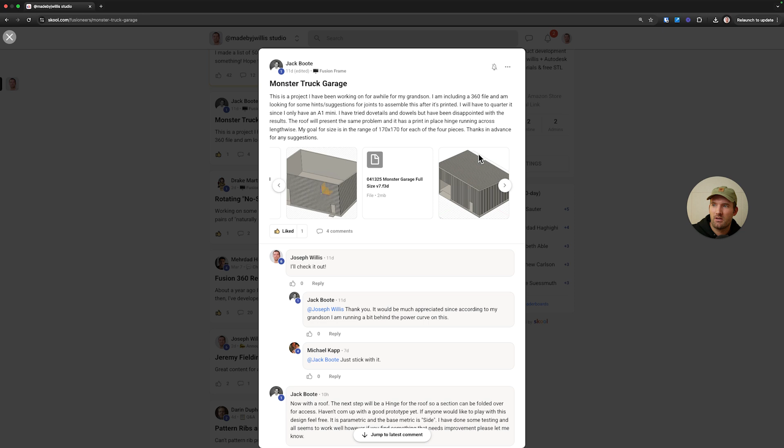He has this monster truck garage design, which is pretty cool for his grandson. He basically has a printer that's a little bit smaller than his design, so he's asking about how to get the roof to go together, and it looks like he actually figured out a solution for that. Another question he had was about a hinge for the roof. So I'm going to pull it up in Fusion and we'll go ahead and see what we can do.

All right, so this is the design file, and he's done a really good job with the design overall. Just a couple tips maybe, or I guess suggestions I would have.

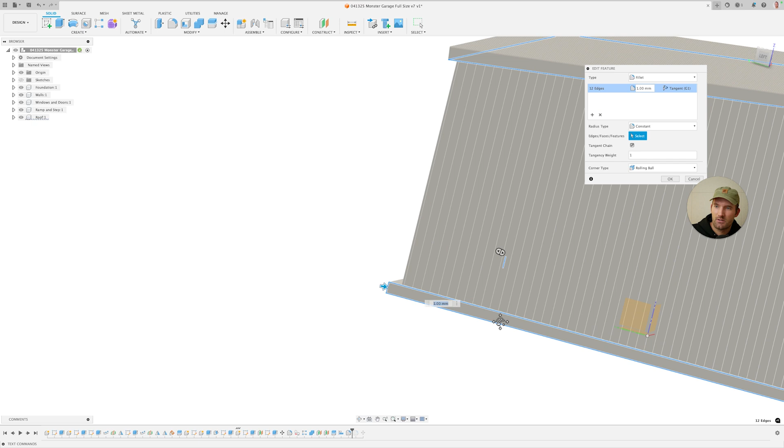On the bottom here he's added fillets, and instead of fillets I would add chamfers to this, just because you're probably going to be printing this bottom down. So I would probably just change these to small chamfers. I'm going to take these off here, and the reason is for the stair stepping effect. It would probably turn out pretty good the way he has it, but I personally prefer chamfers, and they usually come out better when you do that in the plane of the print bed.

I have some short form videos on this, some of them a little bit older at this point, but that's just what I would do. I'm going to take these off here, but actually up here it might be okay, and I'll talk about that more in a second, based on the printing orientation I'm going to suggest for these. So that is what I would do.

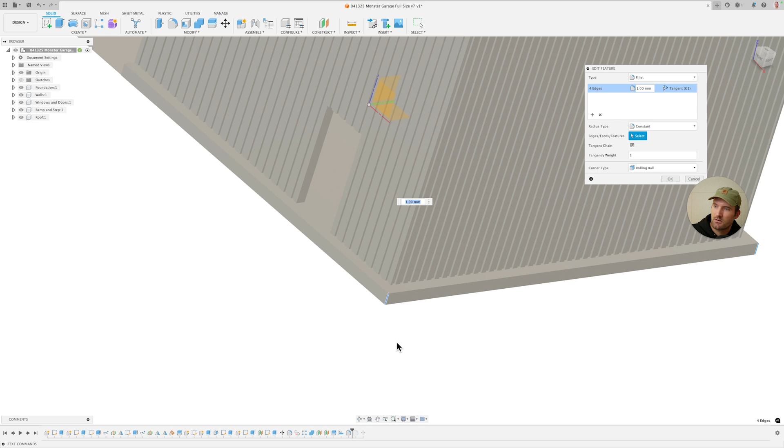So he has a 1mm fillet there, and this is just part of what I think about when I'm doing 3D printing. I'm going to click OK, and then come back and add a small chamfer here, and make this, let's see, yeah, 1mm. It's a different design look. Let's see, why is that having issues? It's probably right here, I bet, is the issue.

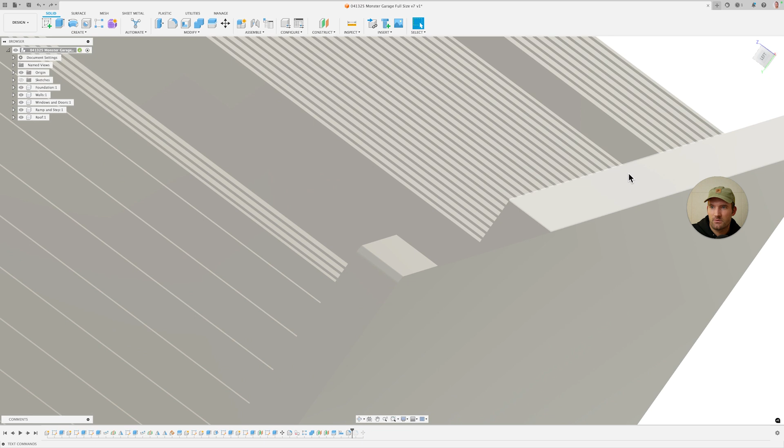I'm also going to suggest - I'm not going to go back and find this feature, I'm just going to use Q, which is press pull, and pull this up a little if it'll let me. Click OK. The reason I'm doing this is because you want to have a little bit of a wall or a step off. If you're thinking about the printer, it's really going to struggle with this because it's so thin here. So basically what I did was use press pull here, grab this, come up a little bit, and click OK.

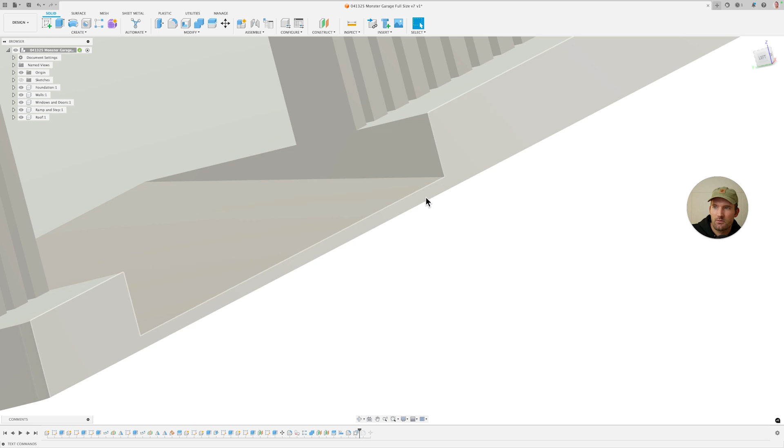So now this is 1mm, and you don't have to make it 1mm, but basically you want to have at least a couple layer lines so that it doesn't have issues printing this. It is a little bit of a step. You could probably get away with like 0.6 or so, but I'd try at least 3 layer lines just so that this feature will come out okay.

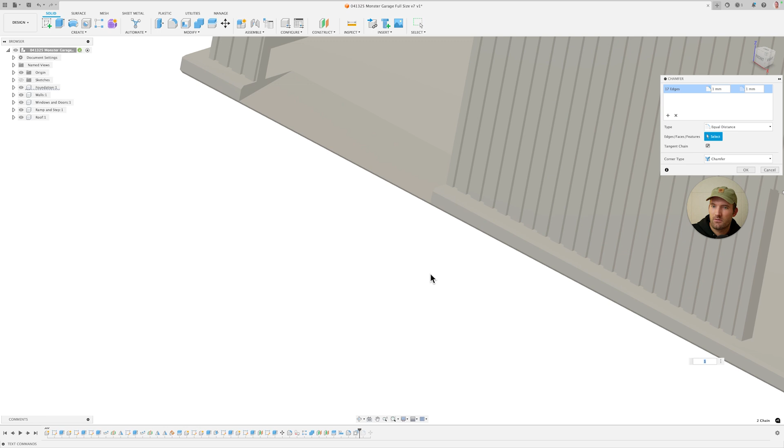I'm going to try that chamfer again, see if it'll work this time. Yeah, so now it's working, and probably not even 1 - I'll probably go with like 0.4 or so, so that's 2 layer lines. You can see here how that'll look, and this will just come out a lot better. It's hard to visualize with 3D printing, but if you can imagine there'll be a layer line there, and then another layer line, and they'll all go up vertically if you're printing this with this on the print bed. And I think that's my suggestion.

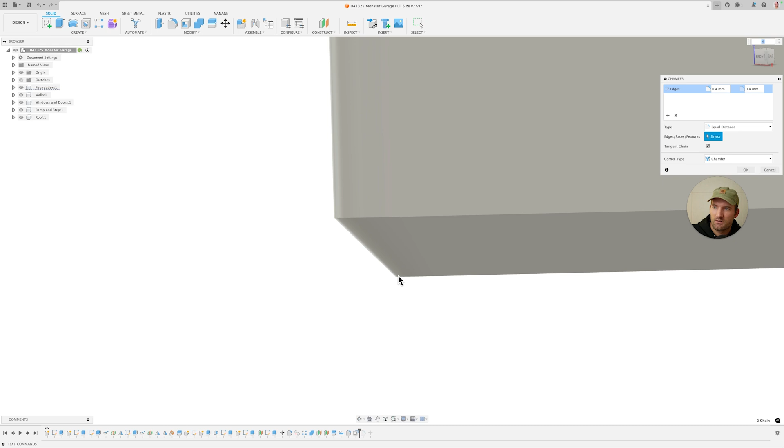The reason - if you think about the curve that was there before, if you zoom really far in and think about the layer lines, you'll have the first layer line here, and then the curve would be coming out, it's a radius, so the next layer line would have a little bit of an overhang. It's not really a big deal with smaller features like this, but at some point, if you have a really big curve, the layer line is basically going to be an overhang, and that's how you get the stair stepping pattern, because the printer G-code is trying to match a curve. As you visualize a curve, each layer is a little bit of an overhang, whereas this is just a straight angle, so it's just kind of a consistent overhang every time. Basically the overhang is the same, a 45 versus a changing overhang with the radius. So I have a video on that.

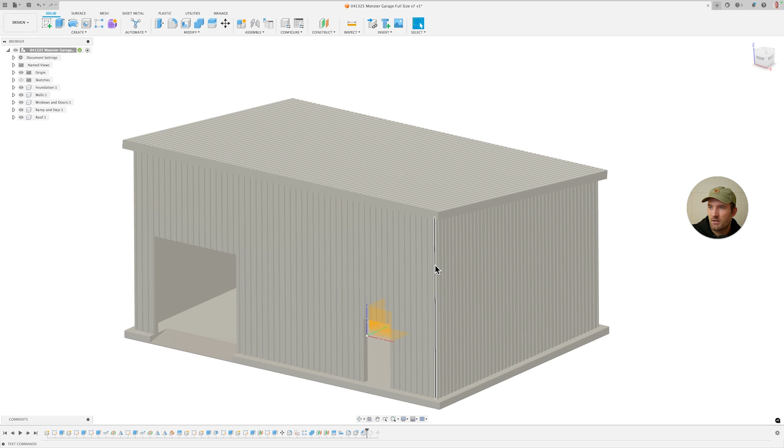So I'm going to click OK with that. And then you can also do the same thing up here, but based on the printing orientation, this might be different. The main thing he was asking about is how to combine the roof here.

So I'm just going to hide these other parts and focus in on the roof designs. I'm just going to select that. And so this is a harder problem because it's not only too wide, but it's also too long.

So his printer, this is 225mm. His printer can do about 170 or so. And then this width here is, let's see, 303.

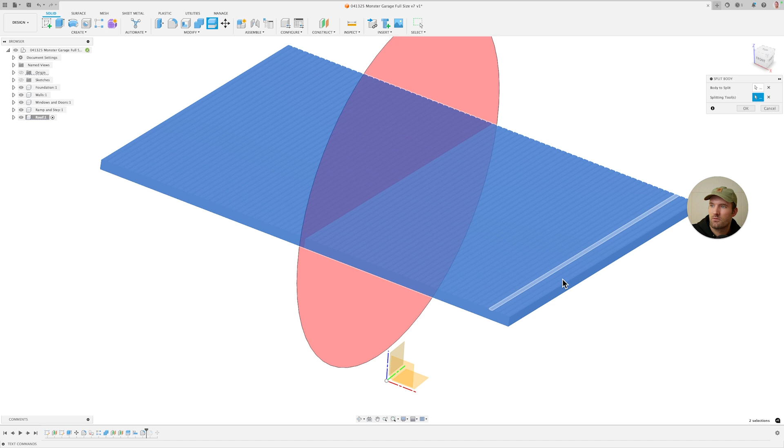So we would at least have to split this in the middle. And I wonder here, I think he has everything centered around the origin. So I'm just going to split the body with the origin and see if that's down the middle roughly. And so it does look like it's down the middle.

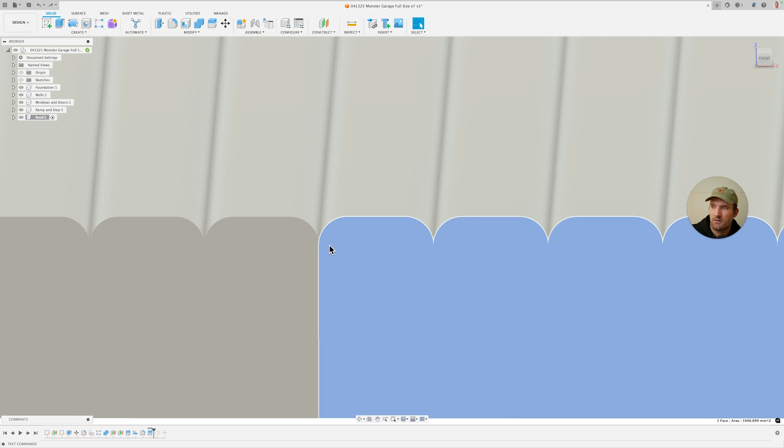So that's good. And one thing that I like to do, and I think he's basically already done this, is use a feature to be my split point. So you can see here he has these little divots in the roof, and it just so happens that this seam that he designed would also be the split seam. So I like trying to do that because that kind of hides the two parts a little bit to some extent.

And so now we have 151 millimeters. So we should be able to print this in one piece and this in one piece, but it's still a little bit too wide. So I'm also going to split it this way as well.

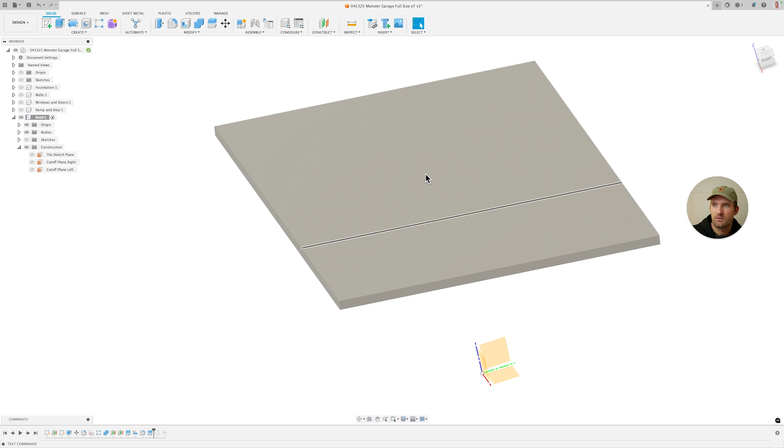So now another thing we want to do is to add a midplane here. Again, remember that this is too long, so we have to split it this way as well. So we're going to add a midplane between this face and this face, and then click OK.

And so now we see that we have a plane down the middle here, and so we can use that to split as well. So I'm going to click split body again, and then we're just going to select that, and then we're also going to select this as well, so it's going to split all of them together, and so that should go ahead and split.

And so now we have 4 different pieces. And so again, there's a lot of different ways you could do this.

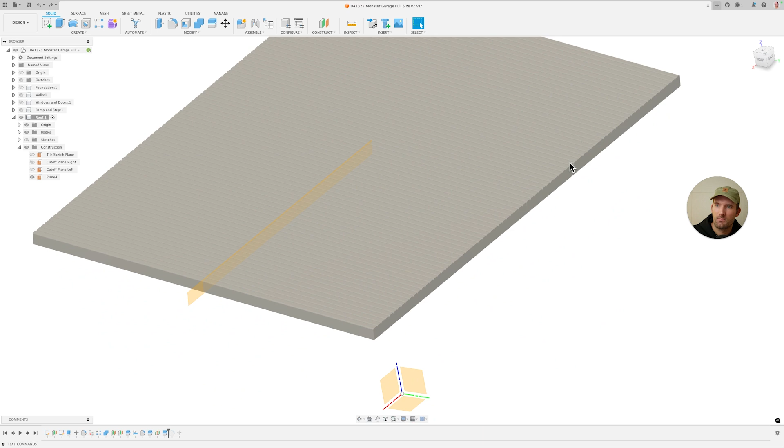The way that I like to do it, and I've done this previously in the past with different designs, is to basically just make a slot mechanism, and that usually works pretty well, especially when the parts are relatively thick. So this is around 7 millimeters thick, so I think it'll work out okay here.

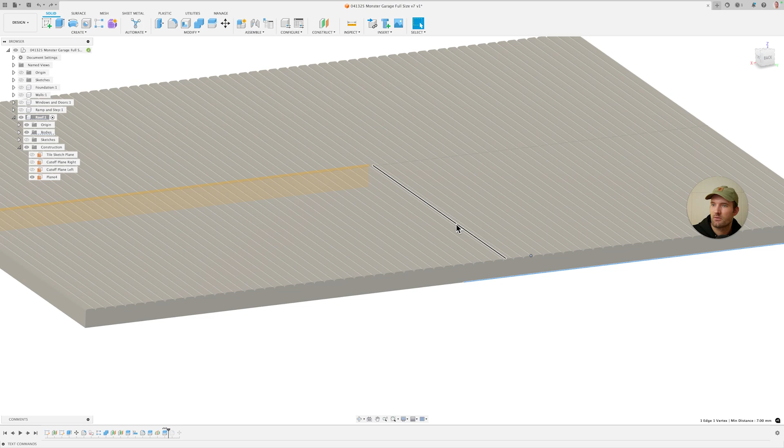And so we're going to assume that this is the front, so we're going to make this as clean as possible, and so we're going to take that into account when designing this. So what I'm going to do here is create a design on the back, and I'm also going to discuss the orientation for printing this at some point here as well.

So I want to create a circle here on this part, and see that I'm drawing on this angle. So this is at an angle, which makes things a little more difficult, but since everything's straight, it shouldn't be an issue. So I'm going to make a circle here.

I got my sketch turned off. There it is. I'm going to turn off these other sketches, and I'll rename that at some point, and then I'm going to create a center point rectangle, and I just use that because I can find the midpoint. If you can see a little triangle, that means I'm at the midpoint.

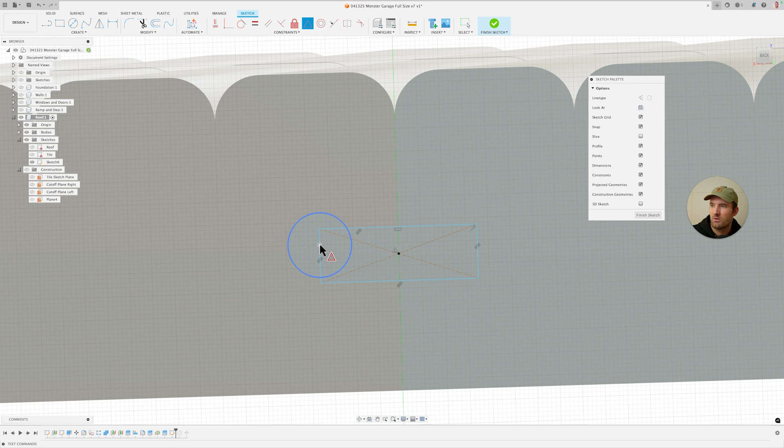And just come over a little bit, and then we're going to make this coincident with this, and then also make that at the midpoint here. And then the size of the circle can vary depending on what you're trying to do.

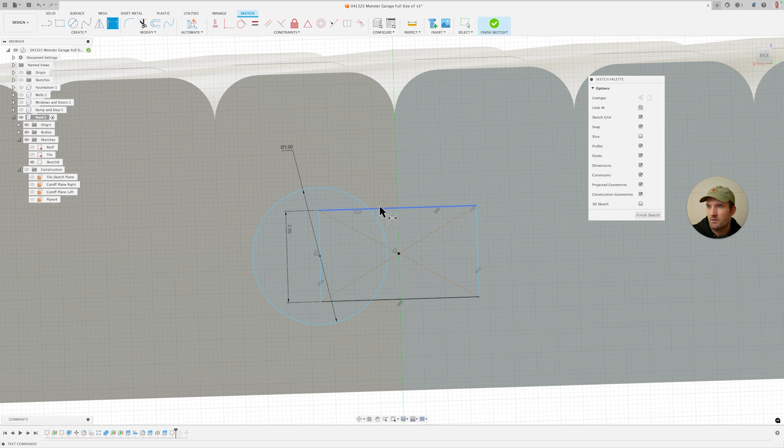I don't want to make it too big because that'll make the wall too thin on the side. So I think 3 is probably good enough. And then I'm going to make this 2 millimeters. I think that'll work. And then for the width here, which is really only half of this dimension, I'm going to make it 4, and I think that'll probably be okay.

Then I'm going to click Finish Sketch, and then make sure I bring my sketch back. I'll just name this Slot. And so now we have a sketch there. And so I'm just going to extrude this part all the way out. So I'm just going to cut it first.

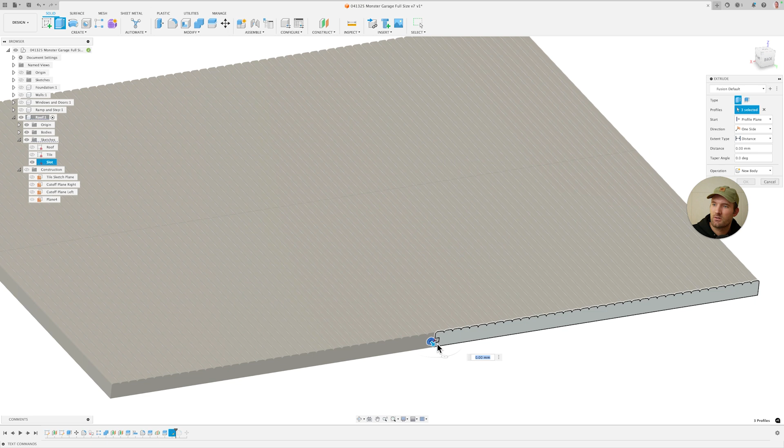So I'm going to cut through both of those bodies, and I'm not going to go all the way to the end. The reason I'm doing that is because I want this front piece to be as smooth as possible. So I'm going to click OK there, and that should have cut through both of the bodies on this side. Yeah, you can kind of see how that other body is down at the end there.

Then I'm going to bring that same sketch back up and extrude again. This time I'm going to actually combine it with this body. So I'm going to hide these other roof parts. So which one is it? So we want to hide...

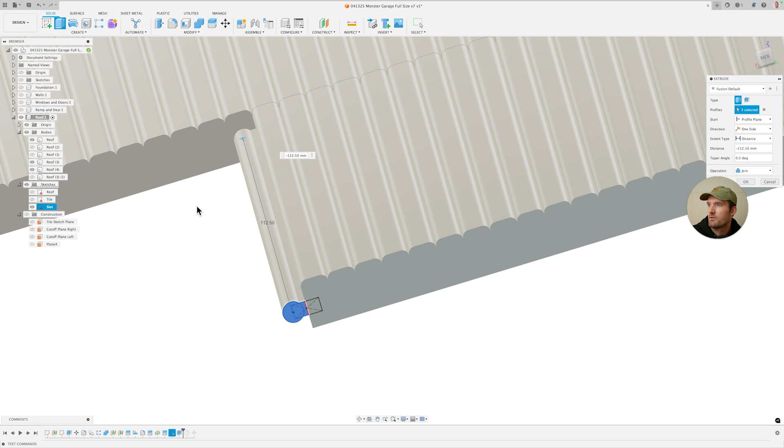Let's see. Yeah, we want to hide that one, and we also want to hide this other one. I'm just going to hide them real quick, just clicking V there.

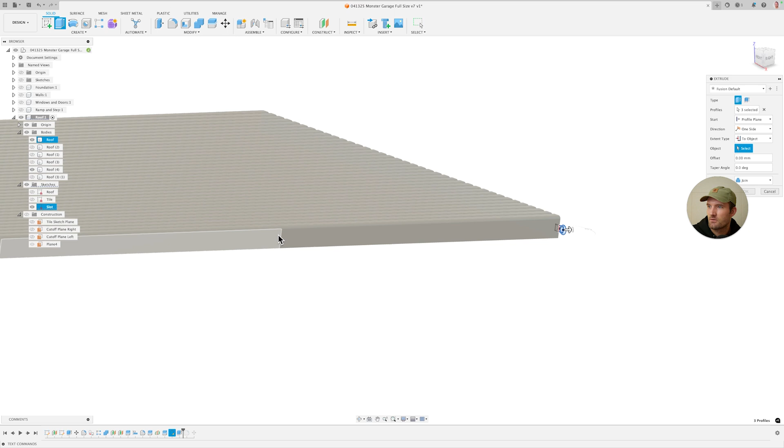So just extrude this out. And if I connected them both, which I really probably should have done before splitting the bodies, but that's kind of hindsight is 2020. So I'm just going to go to here, distance to object. I'm just going to do it to this kind of split plane that we had. It should let me do that. There we go, click OK.

And so now I can just bring that other one back up. Let's see which one it is. There it is. So then I'm going to extrude this again separately. I should be able to just join the one that I want to join, hopefully.

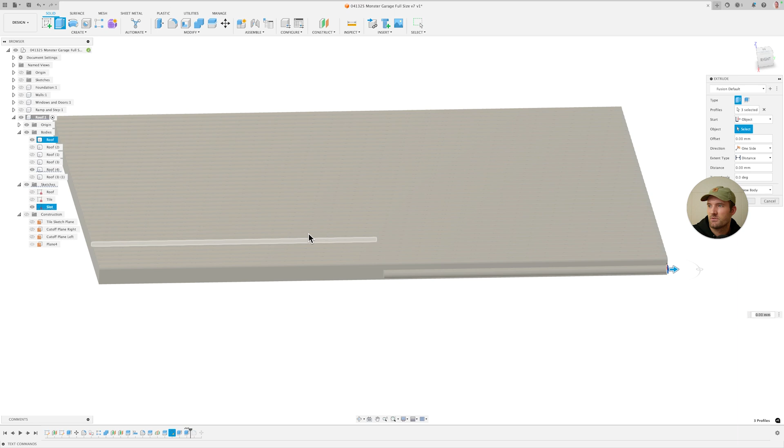This is how we can do it. So we can click extrude and then select these again. And then we're going to do start from object. And then I want to start from this kind of cutout, which we can see if you kind of hover over it.

So I'm going to hold and click and hold and see if it'll let me select that face. I want that face right there. The way I did that, if you're not familiar, if you hover over where you think something is and hold the left click, it gives you these face options, so it lets me select between the two, and I want that kind of profile face.

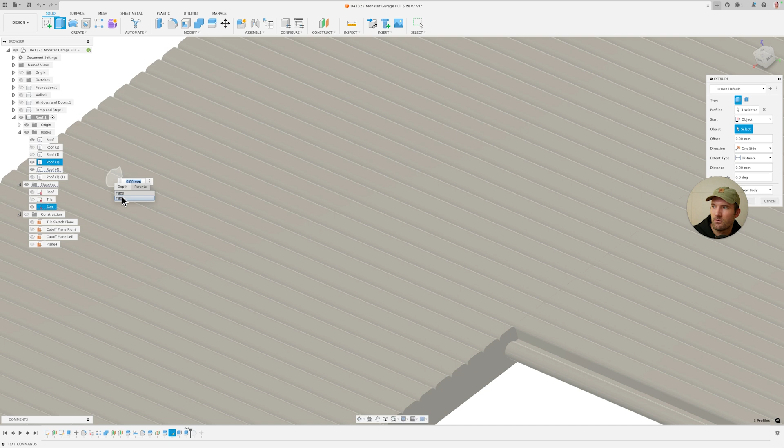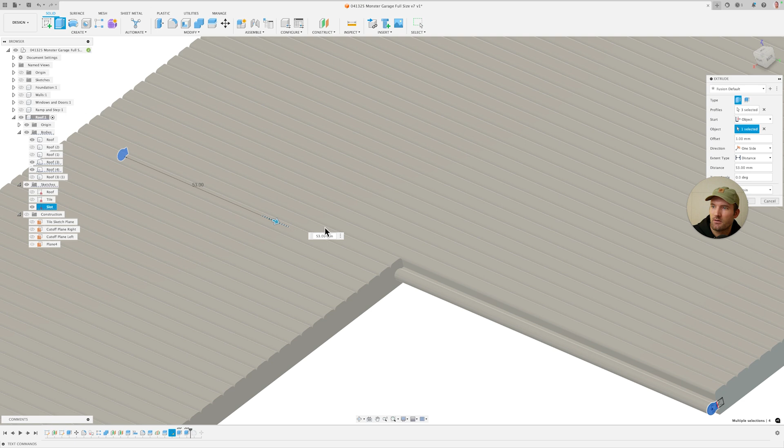So we want to do an offset here of about 1 millimeter or so. The reason we're doing that is we don't want the part to basically not go in far enough. So I offset that flat piece a little bit. Now this is coming out. We don't want to cut through, we just want to go all the way basically to this face.

So we're going to do the distance here to object, to this object. And then we want to make sure that it joins with the right body here. I'm going to turn this one off and then also that one off, and now you can see what we made.

So we made that other profile here, and you can see my offset is a little bit off the bottom of it. You can play around with this amount, it doesn't always have to be 1 millimeter. We can do like 0.4, which is probably enough depending on your printer. Then we're going to click OK.

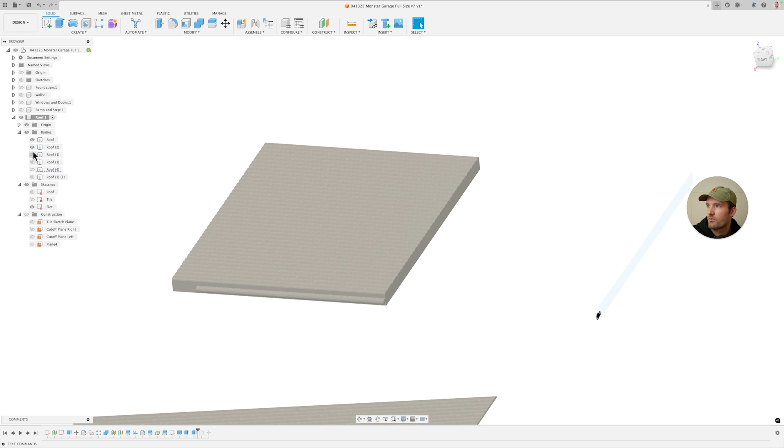All right, so now we have the 4 roof pieces, and this should work. The only thing we have to do now is add a little bit of tolerances. So keep showing that one. Okay, so just to show you again, we have these 2 slots, and the way this will work is they'll slot together.

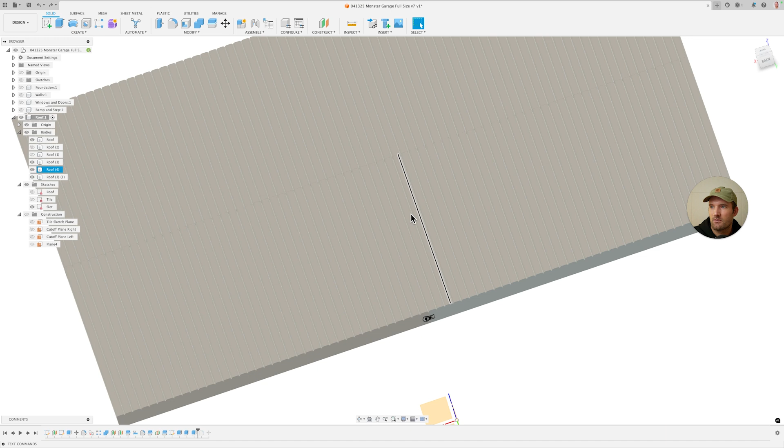The only issue now is that these pieces are not kind of interconnected with each other, so we're going to have to add another feature for that. But we have basically the two split halves connected. You can do that individually and then basically make the piece come together in the middle. The way we're going to do that is I'm just going to add some kind of dowels in the middle. There's different options for that, but that's just one I was thinking about.

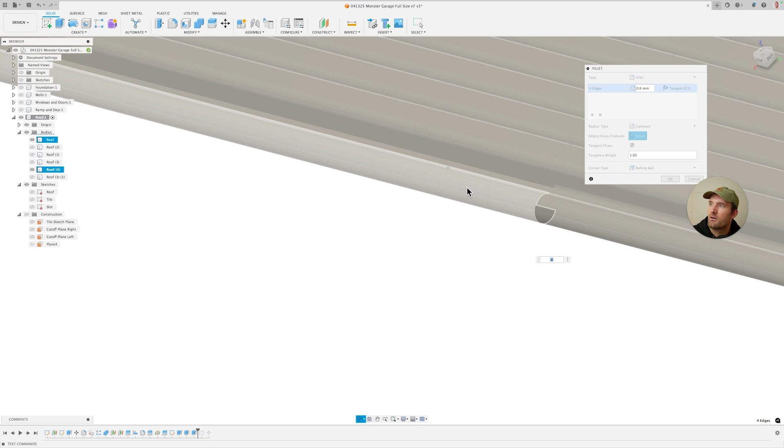The last thing to do for these parts that I like to do is add a little bit of fillets here to make them go in a little bit easier. So I'm going to click F for fillet and then select these parts here, these little edges. This just makes it print a little bit easier. So even let's do 0.6, yeah, something like that really helps. You can see it kind of goes all the way down. Make sure we select this one as well since it's a separate piece.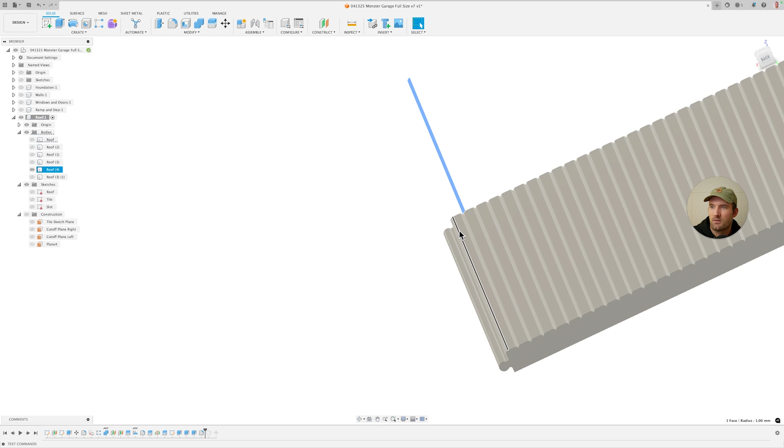And again, you could have gone in a different order and probably been a little more efficient. But again, I'm trying to kind of show y'all just my thought process on it. And then I'm going to do the same thing. I'm just going to go ahead and do this because sometimes it's hard to see the other one. So I'm just going to add 0.6 to the other one, or the other 2 here.

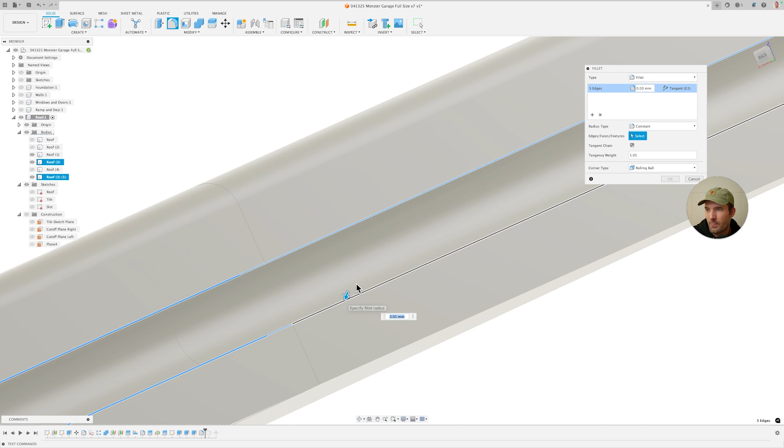All right, so fillet again. And we're just going to add the same amount to these. And then we're going to add a little bit of tolerance here as well, or a little bit of clearance, depending on who you're asking, I guess. All right, so these are all 0.6. Okay. And click OK. And then now I want to make it where they'll slide a little bit easier.

So I'm going to do modify, press pull. And I just want to make it like -0.1 or so and make sure that that's actually getting applied, because sometimes it doesn't really show up very well. So it doesn't really look like that worked. Let's see. Try it again. Press pull. Sometimes I like to do a little bit of an exaggerated thing to see if it's working.

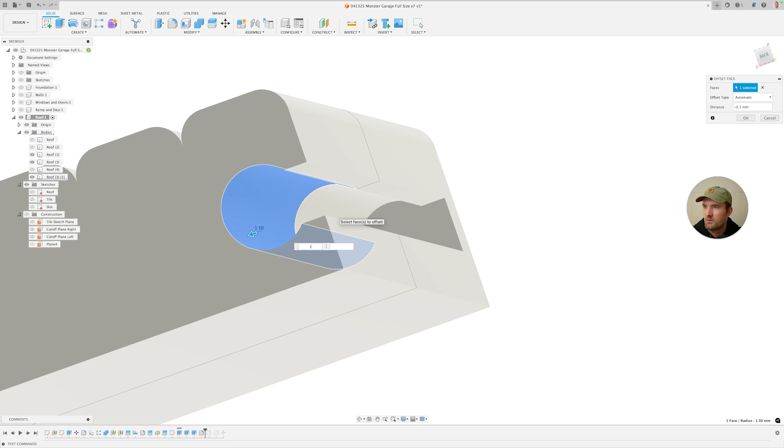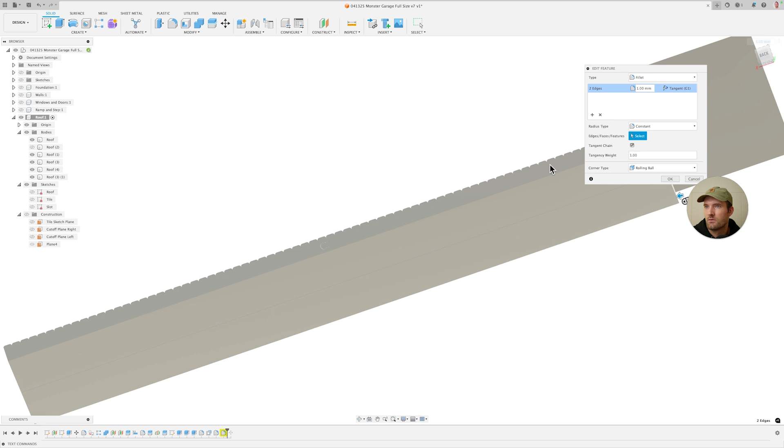So I think I'm actually going to just go before here and do a press pull here. Sometimes press pull is a little finicky. Now it's working. Okay. Click OK. And this should still work. All right, and so now you can see, if you zoom in, there's a little bit of clearance there, and that's just for the tolerances of the printer and everything else.

And usually about 0.1 is what I use. Depends on your printer, but this should make it where it'll slide together. And you can see here that there is no clearance here. So really it's just compensating for that as well if the edge isn't perfect. But this usually results in a pretty tight fit overall.

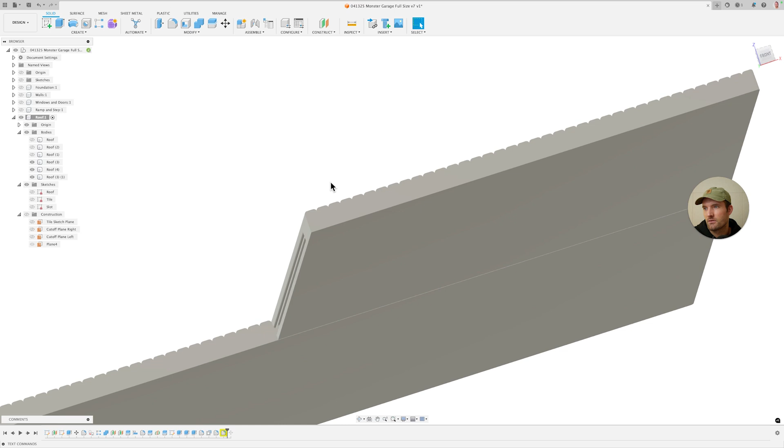And then here on this side, I want to hide this again. On this end, you really can't even see that there's the joint because we have it kind of covered up, hidden back in there. So the way that I would print this, and this is kind of important for the purposes of this, is actually upright. So I would print it with this being on the print bed.

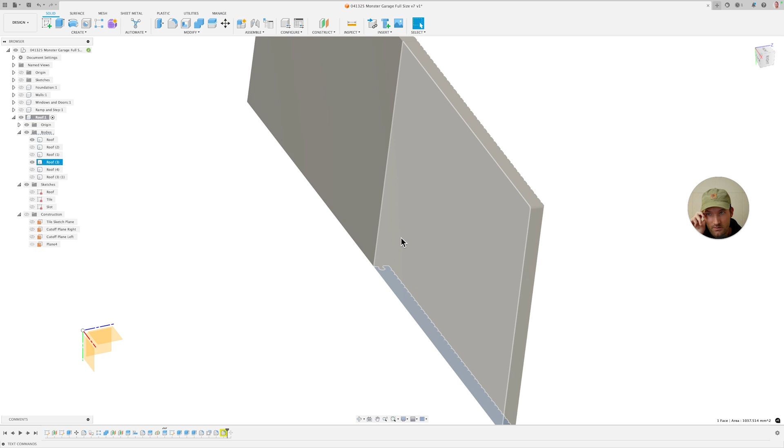And the reason for that is if you print it with this on the print bed, which is how most people would probably think about doing it, it's not going to do these slots very well because it'll be an overhang, or you have to use supports or something. Because if you think about this tube, there's nothing supporting the top of the tube as it's printing. If it's laid down like this, printing the slot part, the top part is going to be overhanging. So if you print it like this, you won't need any supports.

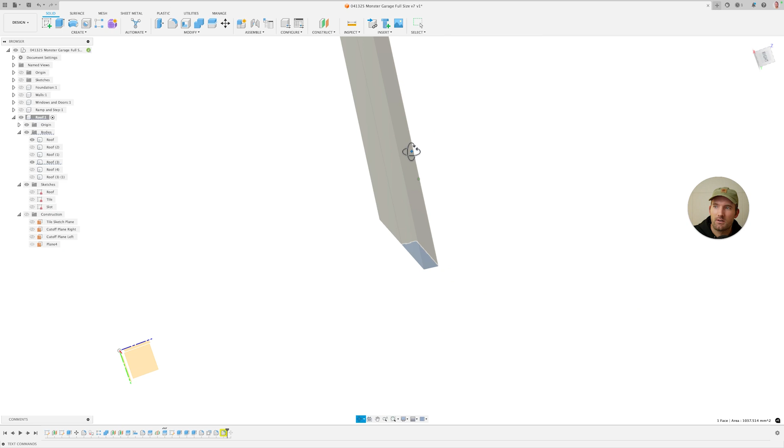And these features are actually better if you print it that way because these are curves, and the printer will do well with those curves. And so that kind of leads into this fillet part. So I'm just going to delete that. And the way I would design this, I would probably have a fillet here, which seems like what he had before. And then you can add a chamfer or something on the top, but I would probably leave the top flat. I think that would give it a nice little feature there.

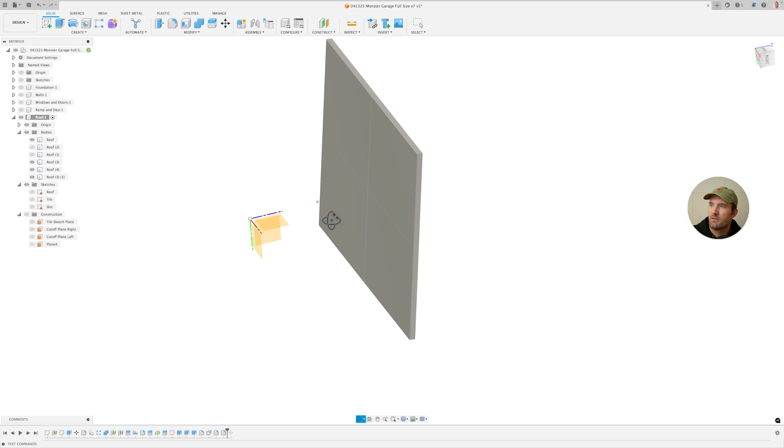So I'm going to add those back here just to make sure that the front and the back have the same little design on them. All right. And so I think that is about it. So the last part would be to add some type of cutout or something here to get these to go together. And you could do this a couple of different ways.

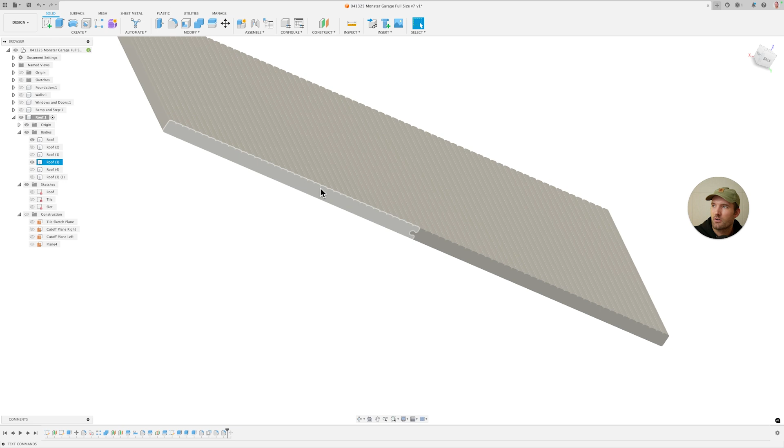One limitation now is that if we're printing it this way, we can't really have anything that pokes out because this is going to be on the print bed. So we need to probably do some type of slot mechanism. And that's probably what I would recommend. It's not the most rigid thing ever, but it should work for this. So what I would probably do is just make some type of little dowel system and use hexagons.

I've mentioned this a number of times on my different videos. I like the little hexagons, and they're just easy to do. They're simple to print, and they usually work pretty well. And if you just do a properly calibrated press fit for stuff like this, it should be fine. There's a lot more elaborate things you could do, but in general, I find that this works pretty well.

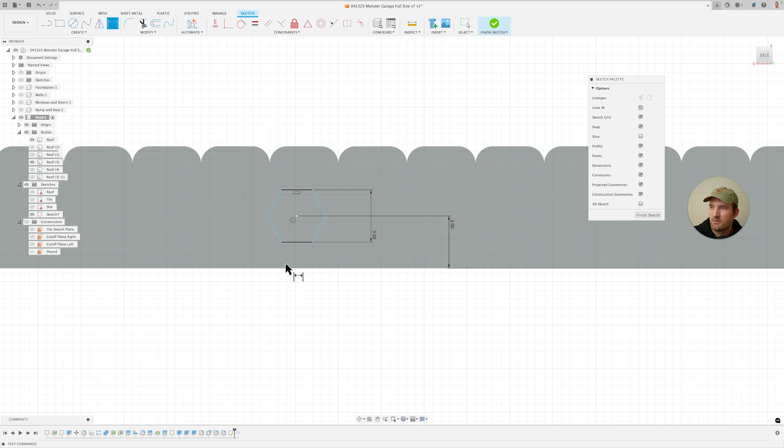So I'm going to make these 3 millimeters, and then I'm just going to dimension this 3.5 because I know that's the center of the 7 millimeter high part. It doesn't look like it's the center because these have the little details, so I might actually just do 3 just so that we don't mess up the detail there. So if you're considering this is the top end and this is the bottom, that's probably closer to the actual distance. And then I'm just going to find some kind of arbitrary distance there,

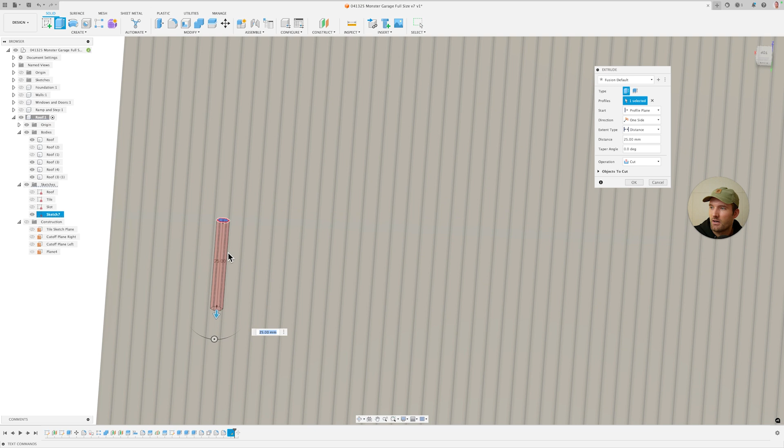and I'm going to click finish sketch. And then I'm just going to extrude these both directions here, make all this visible. So we're going to go, I don't know, let's do like 25 or so, and then do this symmetric, so it's going into both sides. And then the way I'm going to do this is I'm just going to do one at a time, and then I'm going to dimension the pattern, so rectangular pattern of the features. Just going to be that. And then the axis, I'm going to use that as one of the axes.

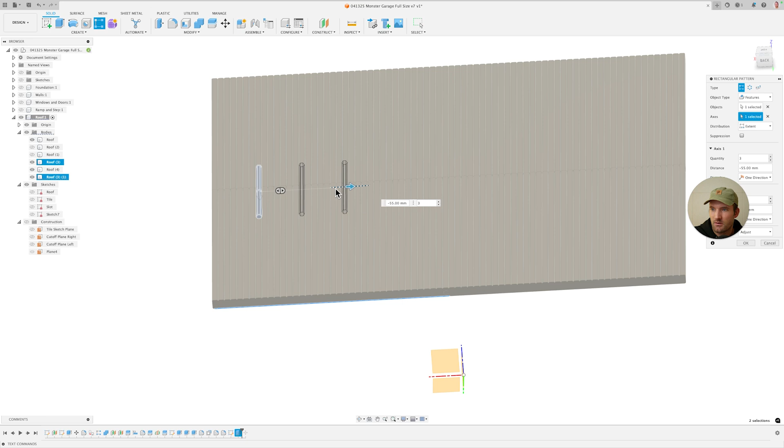And then, let's see. Let's just do, and you could do a little bit better job of making these symmetric and whatnot, but just for the sake of time, I'm just going to do what looks okay and click OK for that. And so now we should have 3 little dowels there. And so now I'm going to mirror that, if it'll let me, create a mirror of features of that initial one, as well as the pattern, and the mirror plane is going to be that mid plane, since everything's about the origin, which is a good design detail he did.

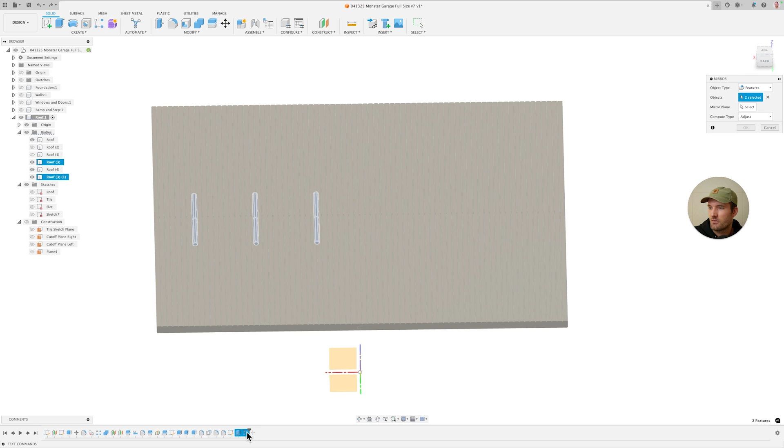And then click OK. And so sometimes that doesn't work. So let's see if I can do it a different way. Mirror, again, features. We're going to do both of these. Mirror plane is here. Sometimes if you change it, it works. I guess not. Okay, let's see. Another way to do this. So that's another little bit of a frustrating thing sometimes.

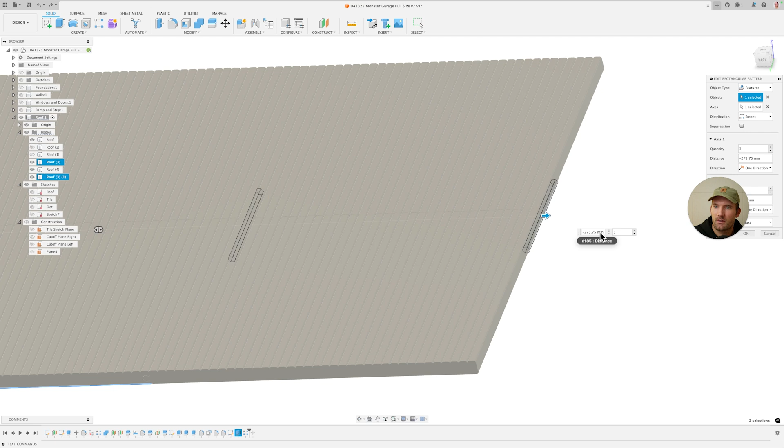Okay, so I'm just going to extend this all the way to the end. Let's see how far. So it's 273 to the end. I did a 30 millimeter offset, so I'm going to say plus 30. And so basically what I was doing was back calculating the distance. So this was 30 millimeters off, I think. And so to get this 30 millimeters, I just said to the end and then added 30 because this is a negative value here. So you can see it's negative 273. So it's added 30, which brought it back 30 millimeters.

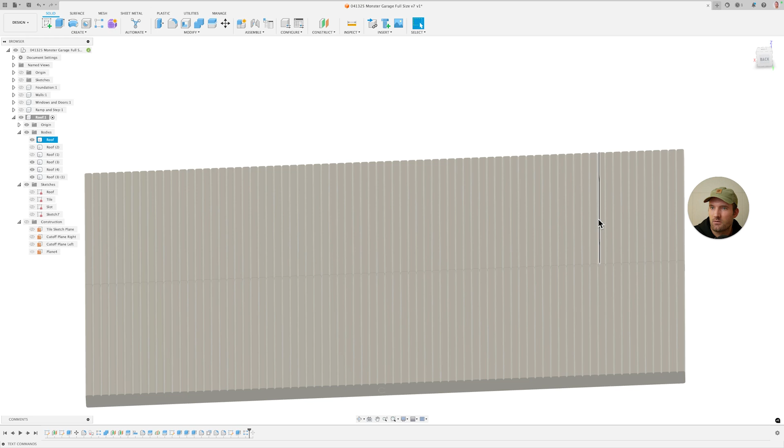So I'm just going to change this to like 6 and just make sure that the split there is down the middle. And so that looks pretty close. It might not be perfect because if it's measuring from the edge of this hexagon, it would technically be like 1.5 millimeters off, but for the purpose of this tutorial, I think this should work. And I'm gonna click OK, and then we're just gonna make sure that we have those, and we don't.

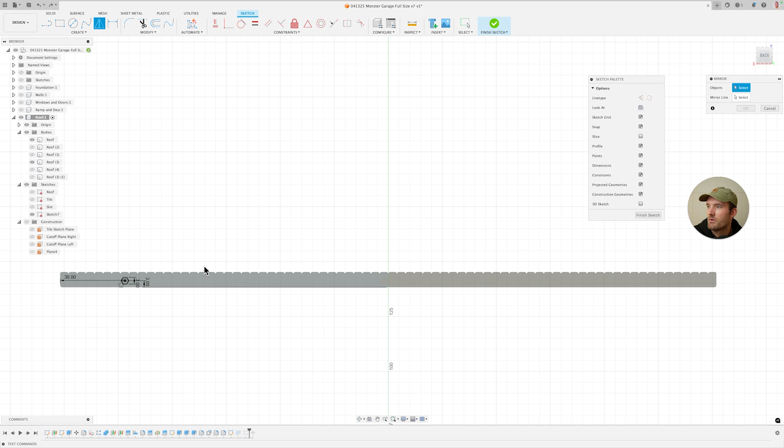So I think the problem with this is it's not picking up that this is a different body. So we might have to just make another one. I think it has to do with it being a pattern. Yeah. Okay. So I'm just going to go back, edit sketch. I'm just going to make another one real quick. Actually, let's do this. So I don't usually recommend doing mirrors of sketches, but this is kind of one of those times where I think it would make sense.

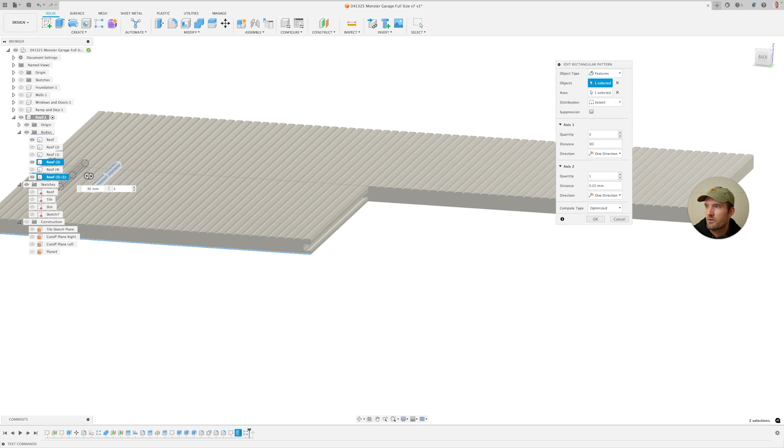And then the mirror will be that. So now you see we have our hexagon over there. So, okay, finish. And so now we can make this back into 3. And our distance, we can do like 30, I think is what we had. And so now we can go and extrude the same thing again. Again, this is not the most optimized solution, but we're going to get there.

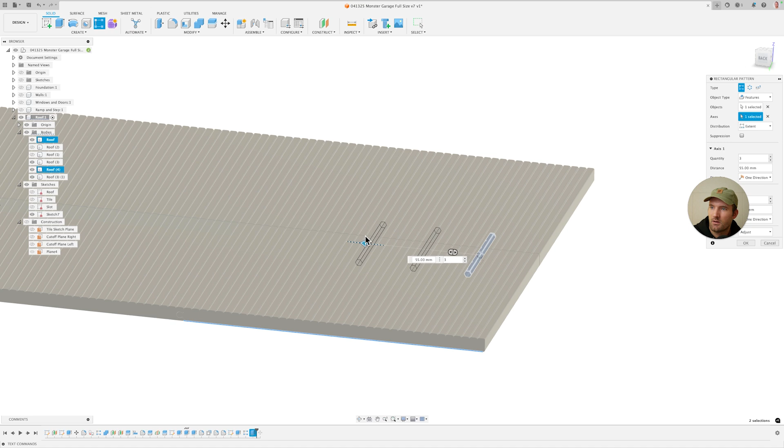So we did 55. All right, so I'm going to extrude this. It's going to be symmetric, 25 each side. And then we're going to do our pattern again of this. And it's going to be on this angle. And then we did 90. All right, and so now we finally have our features there. So now we have the different little plugs.

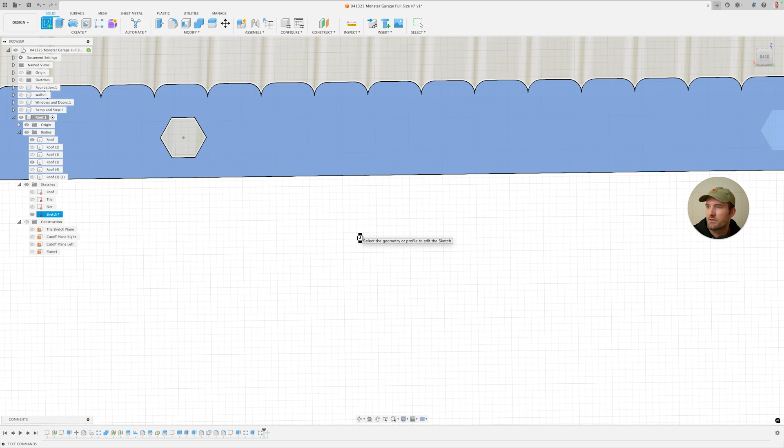And so what I'm going to do is I'm just going to make one of these. So to make our little dowel rod, all I'm going to do is create another sketch here. And you could have done this on the first sketch as well, but I'm just going to offset this a little bit. So offset, and then see if we can select that. If not, we can project. So we need to project it first.

Click OK, offset. And so we just want it to be a little bit smaller so that the rod will fit in there. And you might have to play around with this. I'm going to try -0.1, but it's going to really depend on your printer. And so then we're just going to try and select just that inner profile.

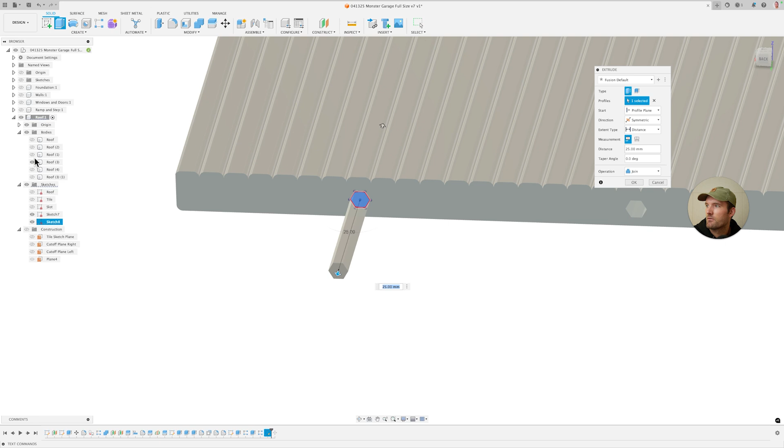And then last time we made these symmetric, basically 50 millimeters total, because we did 25 in both directions. And if we turn off that, so that's 50 millimeters. So I'm going to do like 24, and that's just giving you 1 millimeter on each side to have a little bit of play, just so that it doesn't prevent you from getting a tight fit there. And then I'm going to click OK.

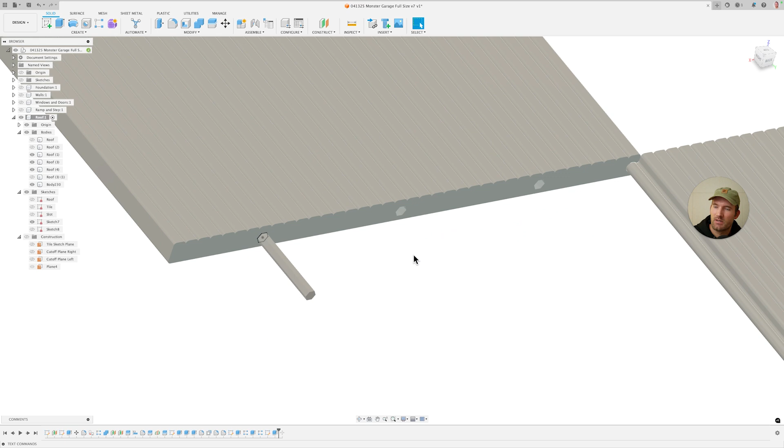All right, and so now we have all of the parts again. And so you can see how basically you'd have these 4 pieces, and then you have the dowels going across to anchor it this way, and then you have the slot going through the middle to keep these together. And so I think that would work for this design. I think it would turn out okay. You'd always have a seam down the middle here, but otherwise I think that should work all right.

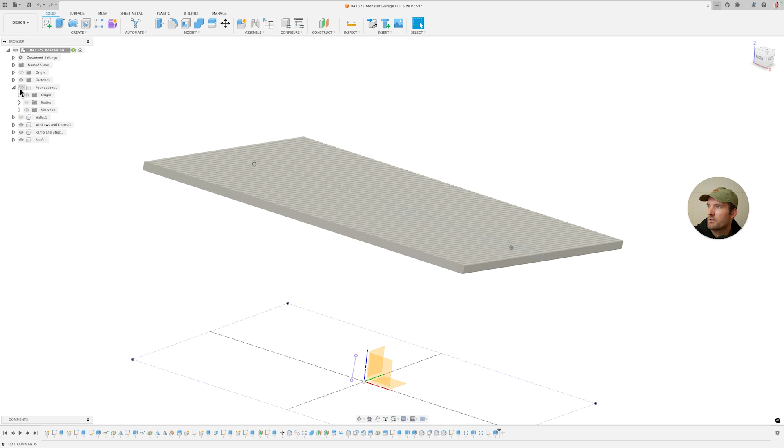And then I guess, the last thing, he mentioned a hinge system, and that sometimes can be a little bit more challenging just from the aspect of, there's a lot of ways to do it, and I want to try and get all the bodies to show up here. All right. Okay, and so now what I would do personally is I would make it where these have little ridges inside of them, and they kind of sit down inside of this.

So I would basically forget about the hinge and make it where it has kind of like a cubby to sit into. So the way I would do that is I would take this, and I would just have a little extrusion along the side here with the angle so that you can print it since this is going to be oriented vertically, and print it that way. And that way you could just take the whole top off and put it back down.

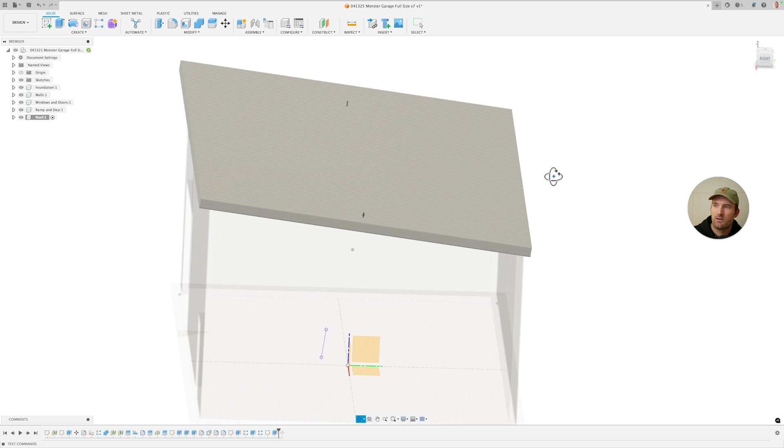It would be a little fragile because of the joint here in the middle, but I think in general that would probably be a more clean solution. Anywhere you put a hinge with a part this big, you're going to probably need something that's relatively reinforced. And if kids are messing with it, it's probably pretty easy for them to break it, just to be honest.

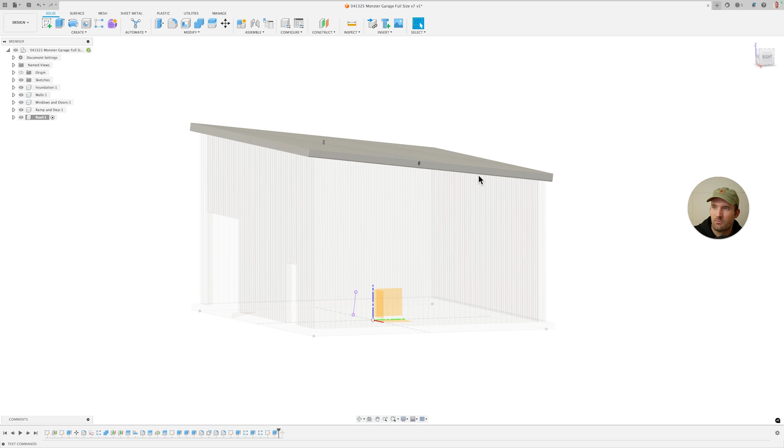So this is what I would do. I would come here, and let's find a good spot to do this. I'm just going to draw it off the center, off the mid plane here. And I would basically project and get the edge of these parts here. And really could have done this beforehand. And then I'm also going to project this wall here. So I want to get the inside of that face.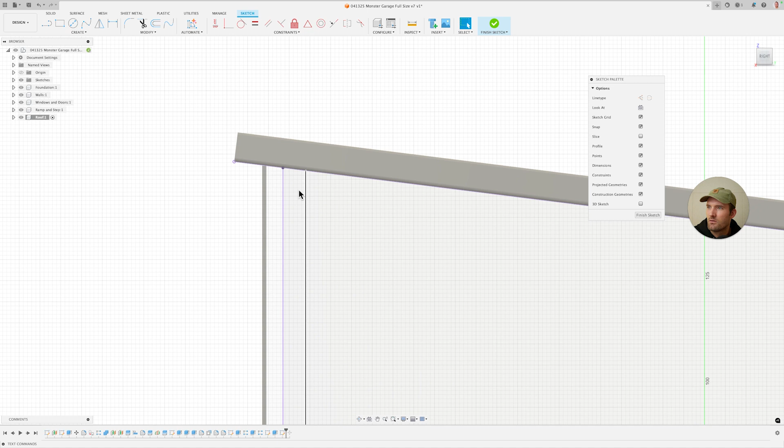I'm going to right click and hold, and I should be able to select that. Yeah, so that's the inside wall. So I'm going to click OK on that. And I'm going to project the other inside wall here. So again, click and hold, and it lets you select that wall. And then click OK. I think that's the wall. It's kind of hard to tell sometimes.

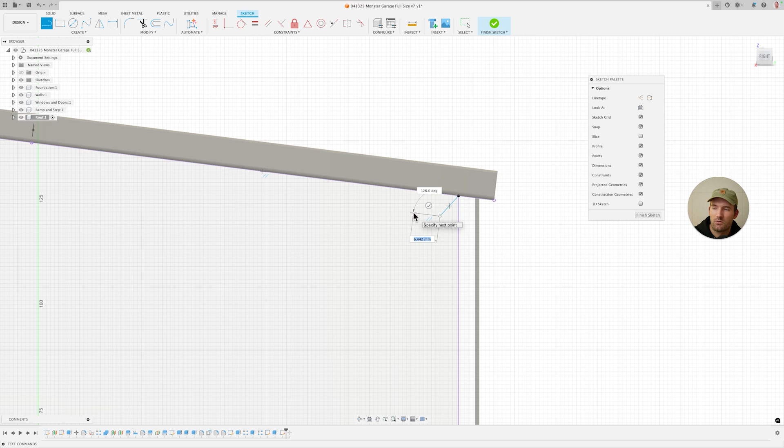Okay. And so then what I would do is I would just make a little groove, basically a little section here. It needs to be angled just so that it would print, because remember, we're printing this vertically, so we can't have a straight overhang. You could add a little bit of supports, but I would just recommend doing it like this, and it should work okay. Make this, like 45 usually works pretty well, and this will just make it kind of sit in the right spot.

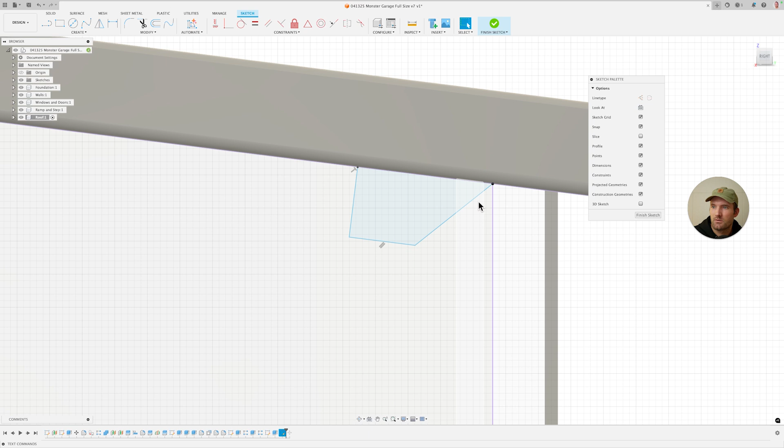You could do the straight angle, which I think actually I would probably go ahead and add the supports here. So let's actually redo this. Just going to make it parallel, and this is going to need a little bit of support, and we'll just design that real quick as well. So we're going to make this parallel, and then make this parallel to that, just because this won't really matter as much. And then make this one parallel as well. So that's perpendicular.

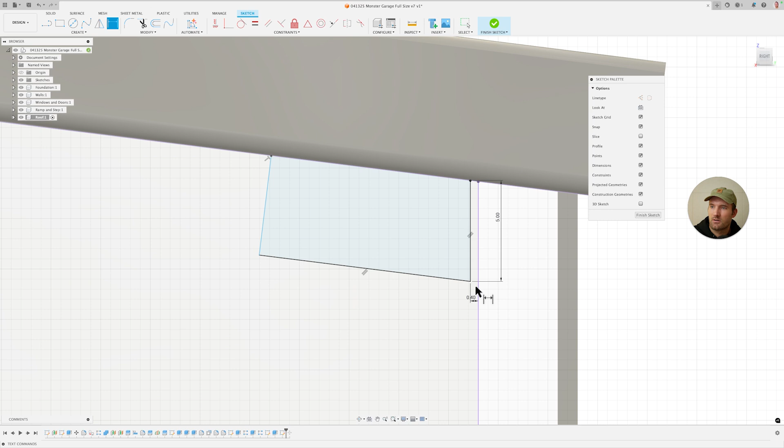That's fine. Just make it perpendicular how it was. Looks kind of funny, but that's okay. And then let's make this, I think 5mm is fine. And then you want to have a tiny amount of slack here, but I wouldn't have a whole lot. You can mess around with that value some too. And then the distance here, 10mm is plenty.

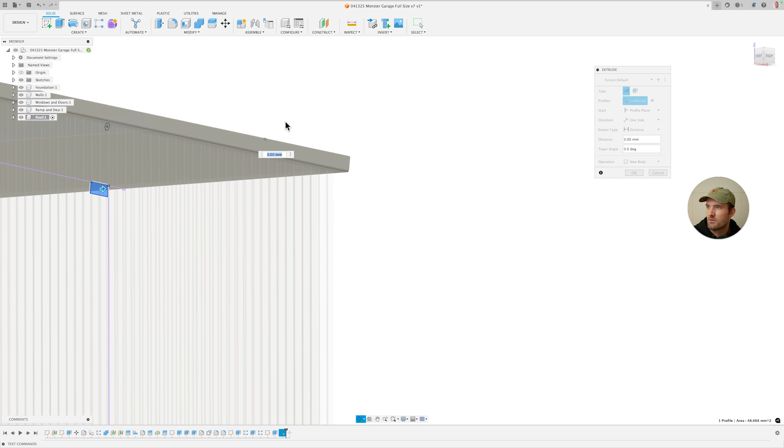And then I would just basically extrude this out, and it really doesn't have to be that big. So let's see, let's hide. Actually, we should be able to select it now. There we go. And so what I'm doing is making a little notch where it should fit pretty easily. What I would actually do is go all the way to this wall and then maybe offset it just a little bit. So let's see, extent to object.

Make sure we select the wall again, press and hold, and you get the face. And so that's going to go all the way against the face. We want to offset like point... I'm going to make sure that's the right direction first. Yeah, so positive is the right direction. So I'm going to do like -0.4 or so. So that's leaving a tiny little gap between the wall and our little offset.

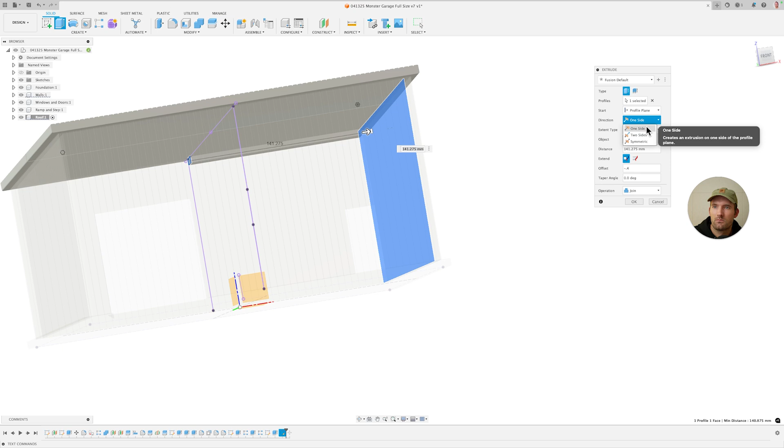And so I'm actually going to do this in both directions, and I'm just going to split it again. And this will also lock everything in a little better as well. So yeah, now I'm going to click OK. And so now we have a way to make sure it's in there, if that makes sense. So you could do a similar thing up here, and that would reinforce everything a little bit. But I think this would probably be enough.

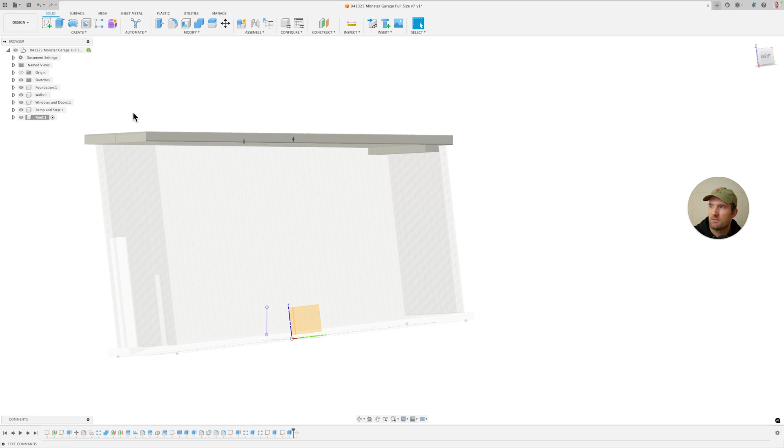And then it would also allow you to lift it up. That would act as a little bit of a hinge. It would fall out if you lifted it all the way up, but you could peek inside without taking it all the way off. And I just think this is a little bit cleaner mechanism than a hinge, and it wouldn't break as easily.

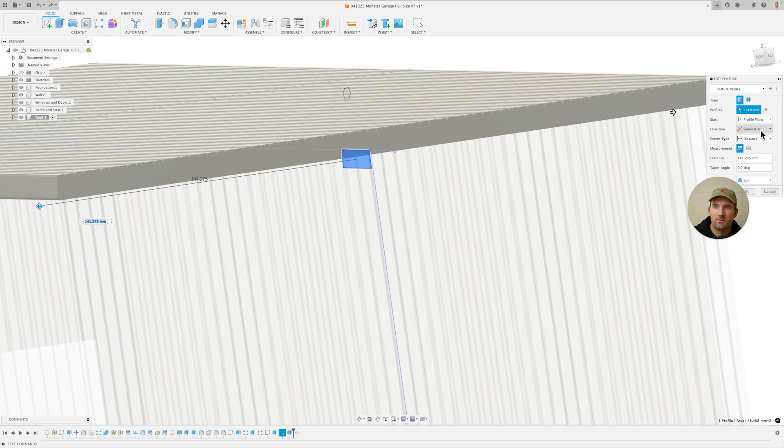So the other thing we're going to have to do now is, this is probably, yes, one piece again. So we need to split this again, or actually it'd probably be easier, honestly, just to do one side at a time. So let's just do one side. Okay. And then we'll just repeat that same thing again on the other side. All right, make sure that it's going to join with the right body. I'm going to hide that one.

And then we're going to go distance to object again. We're going to go to this wall here. And then we're going to do an offset of, just make sure it's the right way. Yeah, 0.4. And so again, you can see here, it's 0.4 off of that wall. And then we need to make sure that our roof that we want to join with is not hidden. It looks like our roof got joined together at some point, which is not the intention. It was probably on that last extrusion.

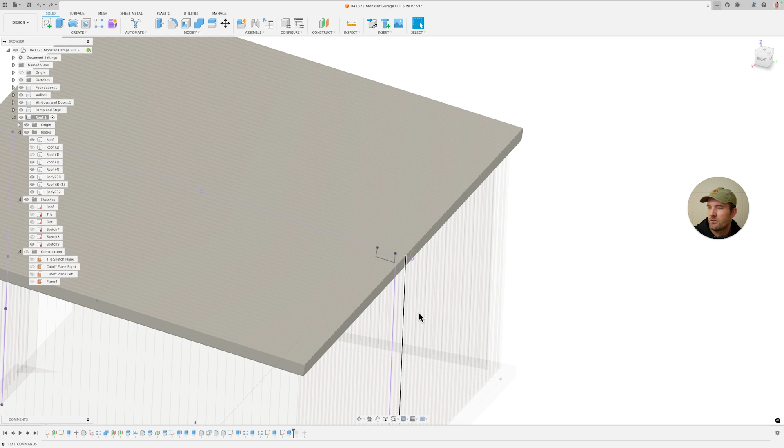Let's see here. Yeah, so need to make sure that on this one, let's just do new body, and then I'll combine them here at this point. Yeah, new body. Okay, and so what we'll have to do here is we can just join these. So combine that with that. Okay. And then combine this and this.

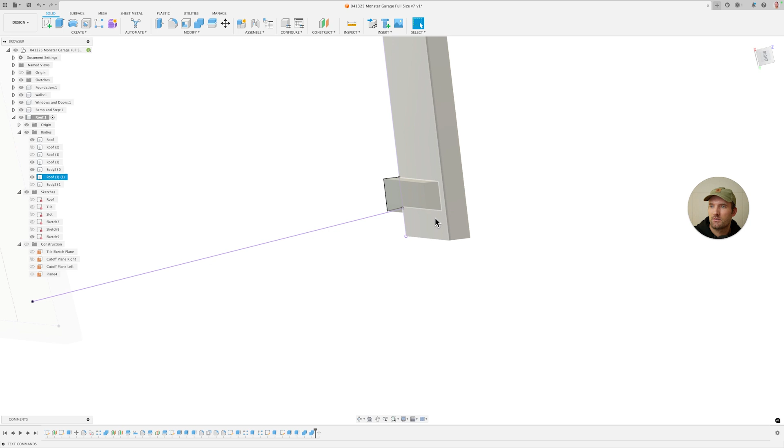Okay. And so now the last thing to do is, if we're going to print these upright, you can see that we'll need some type of support here. And really, I think it'd probably be fine just to use the standard supports, especially for something like this. It's not really going to be seen that much. So I would just make sure that there's tree supports or something under here. And then, yeah, that should work. And just make sure you print 4 or 6 of these little hexagons.

And the last thing I would also recommend here is just to go ahead and add a chamfer. So like 0.4 or something like that, just because the ends sometimes are hard to get started. So that should help with that. And so I think that is how I would do this.

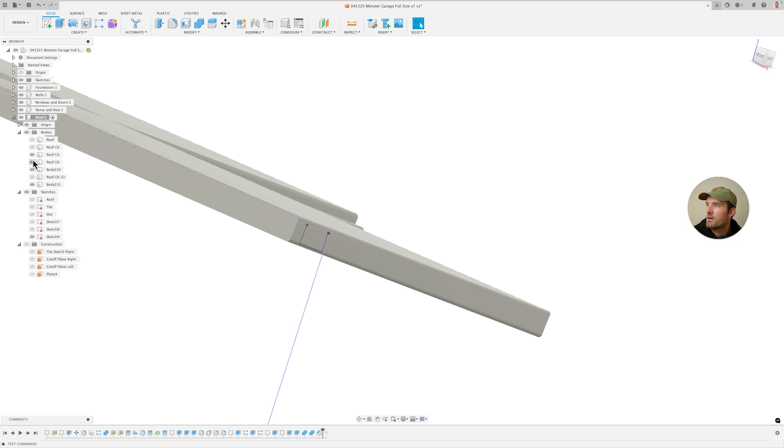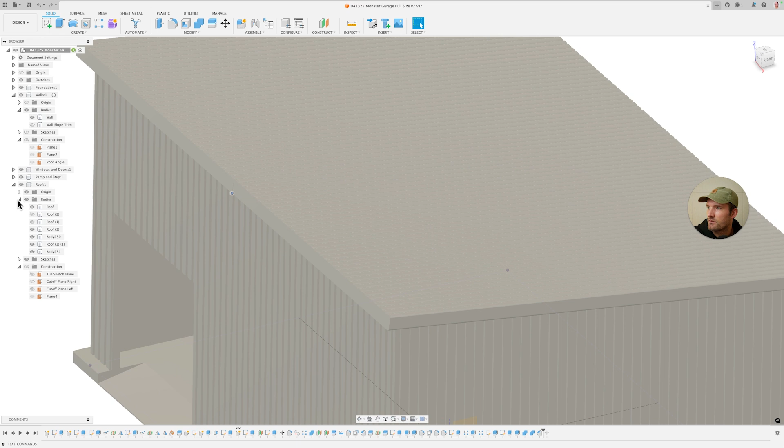I know it was a little bit of a longer video, but hopefully some of y'all will get something out of it. Just trying to explain my thought process. And obviously there are a lot of ways to do this, but I think that is how I would do it. The other option, which I did in the video where I made the AMS mounts, was basically to have a dowel and pin system. And that would also work. It's just a little more challenging to do, I think, in general. So yeah, I think that's it.